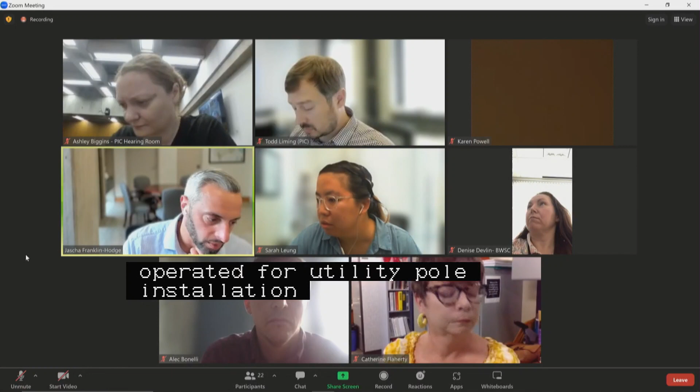On to our next agenda item, utility pole hearing number 1 on a joint petition by Eversource Energy and Verizon New England Incorporated for utility pole installation within Crosstown Avenue, Public Way, West Roxbury, to relocate one private utility pole to be located on its northerly side, generally at address numbers 1 through 7 west of Centre Street. Would the proponents please introduce themselves, their affiliations, give a brief overview of the project, and then we'll open it up for commissioners to ask questions, followed by PIC staff and public comment.

Hi, good morning. This is Catherine Flaherty from Eversource Electric. We are asking to relocate that pole approximately 18 feet west from the current location because of new construction there. There's a driveway. I can share the plan with you. That would be great. You can see that. Just a second.

While Katie's doing this, I will just mention that this section of Crosstown Ave is actually a private way. We're bringing this to the commission just for clarity's sake and so that everybody understands what's going on, but just wanted to make that clear. There we go. Okay. Can you see the plan now? Yes. So here's the pole now where it is located, and then we're asking to relocate it right over here, out of the way of the new driveway.

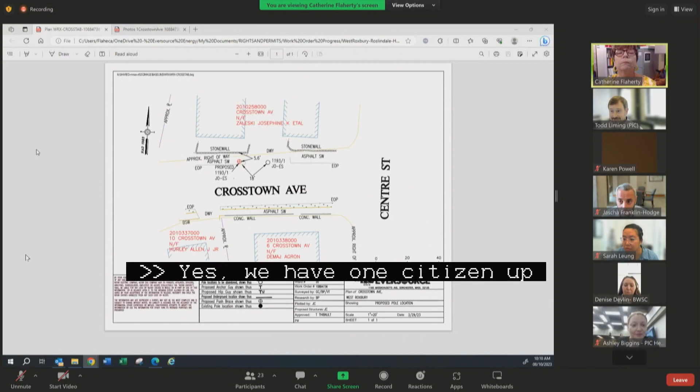Thank you very much. Commissioners, any questions or comments? PIC staff or members of the public? Nope. Ashley, you're all set on this? Yes, we have one citizen up here that's just kind of checking out to see what's going on, but no comments as of now. Ashley, you're muted. Oh, you can't hear the room? Or the room is muted, I should say. Okay, well, we're good. All set. Thank you.

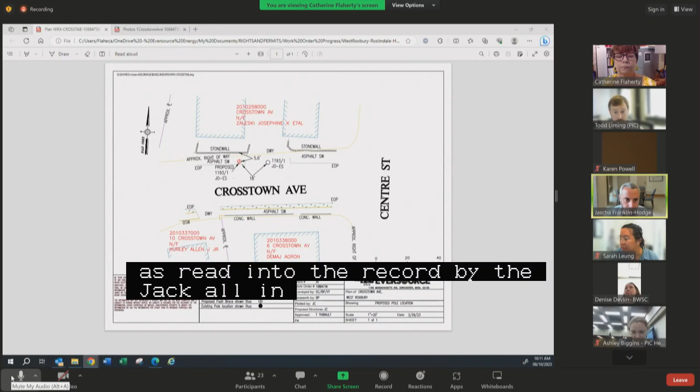All right, hearing no other comments or questions and seeing no raised hands from members of the public, do I hear a motion to approve utility pole hearing number 1? I'll make a motion to approve utility pole hearing number 1 on a joint petition by Eversource Energy and Verizon New England Incorporated for utility pole installation within Crosstown Ave, Public Way, West Roxbury, as read into the record by the chair. Second. All in favor? Aye. Aye. Aye. Aye. Any opposed or abstained? So moved. Thank you very much. Thank you.

On to our first public hearing on a petition by the Boston Redevelopment Authority, DBA Boston Planning and Development Agency, for the acceptance of 2 pedestrian easements adjacent to the following public ways in Boston proper: Hudson Street on its westerly side at address numbers 49 to 63, generally between Kneeland Street and Harvard Street; Tyler Street on its easterly side at address numbers 48 to 58, generally between Kneeland Street and Harvard Street.

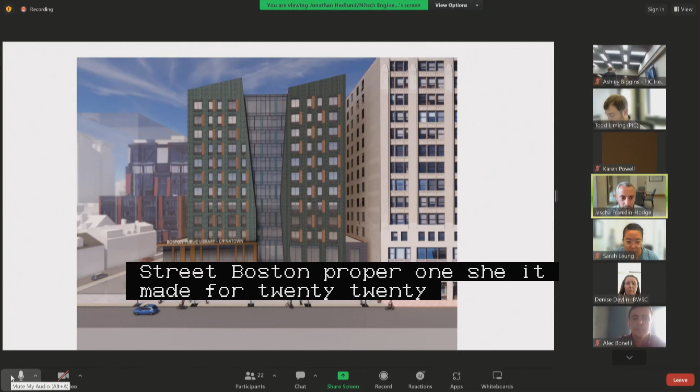This was new business on July 27th and is shown on a plan entitled City of Boston Public Works Department Engineering Division Pedestrian Easement Plan, 55 Hudson Street, Boston proper, one sheet dated May 4th, 2023. Would the proponents please introduce themselves, their affiliations, provide a brief reintroduction to the project, and report back on any changes or outstanding questions from your new business hearing.

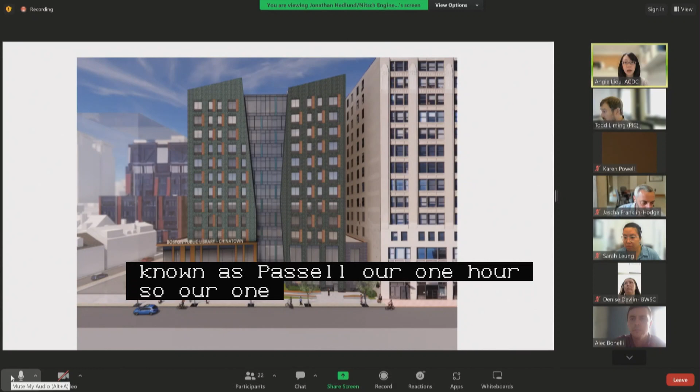Hi, everyone. My name is Angie Liu, and I am the Executive Director of the Asian Community Development Corporation, which is the proponent for this project at 55 Hudson Street, also known as Parcel R1. Parcel R1 is a site currently owned by the Boston Planning and Development Agency. This site on Hudson Street is located in the heart of Boston's Chinatown and has long been advocated by the Chinatown community for its conversion from a parking lot to community uses, including affordable housing.

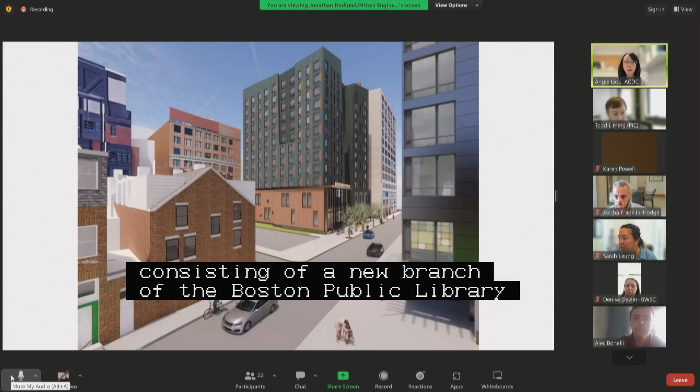The proposed project will consist of a 12-story building, as you see here, consisting of a new branch of the Boston Public Library on the first 2 floors, which Chinatown has not had for about half a century. The upper floors will consist of 110 residential units, which will be affordable, with 44 homeownership units and 66 rentals.

And now I'm going to turn it over to Jonathan Hedlund from Nitsch Engineering.

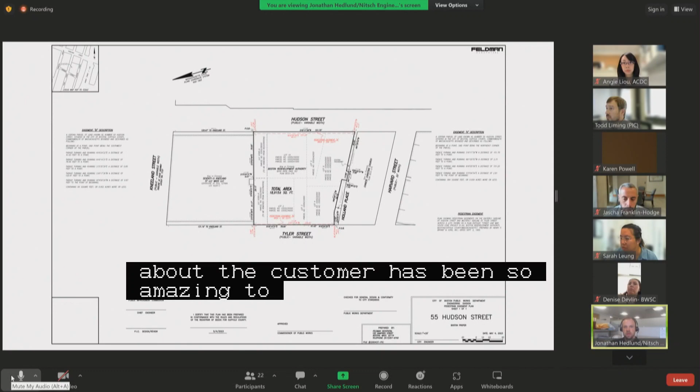I'm Jonathan Hedlund with Nitsch Engineering on behalf of the proponent. I'll first talk about the pedestrian easements. We're proposing 2 pedestrian easements, one along Hudson Street and one along Tyler Street. The one along Hudson Street will be approximately 2.5 feet by 151 feet. The one along Tyler Street will be approximately 0.8 feet by 200 feet.

Excellent, thank you very much. Commissioners, any questions or comments? PIC staff or members of the public? No, I'm all set here.

All right, do I hear a motion to approve public hearing number 1? I'll make a motion to approve public hearing number 1 on a petition by the Boston Redevelopment Authority for the acceptance of 2 pedestrian easements along the following public ways: Hudson Street and Tyler Street, as read into the record by the chair.

Second. All in favor? Aye. Aye. Any opposed or abstained?

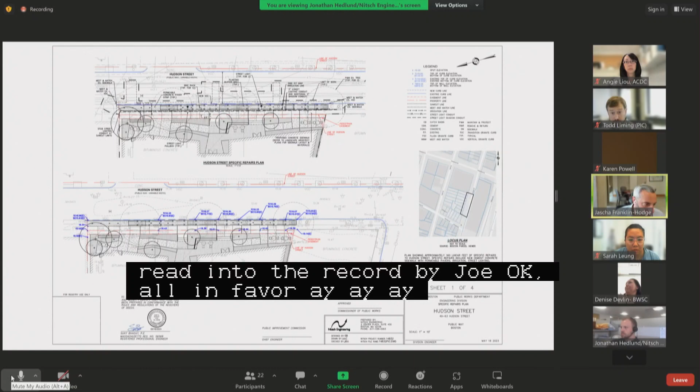So moved. On to public hearing number 2, on a joint petition by Asian Community Development Corporation and the Boston Redevelopment Authority, DBA Boston Planning and Development Agency, for the making of specific repairs within the following public ways in Boston proper, consisting of curb and sidewalk reconstruction with structural soil, as well as new and relocated specialty pavement, street lighting infrastructure, street trees, irrigation infrastructure, bike racks, and curb cuts. Hudson Street on the westerly side at address number 49 to 63, generally between Kneeland Street and Harvard Street. Tyler Street on its easterly side at address numbers 48 to 58, generally between Kneeland Street and Harvard Street.

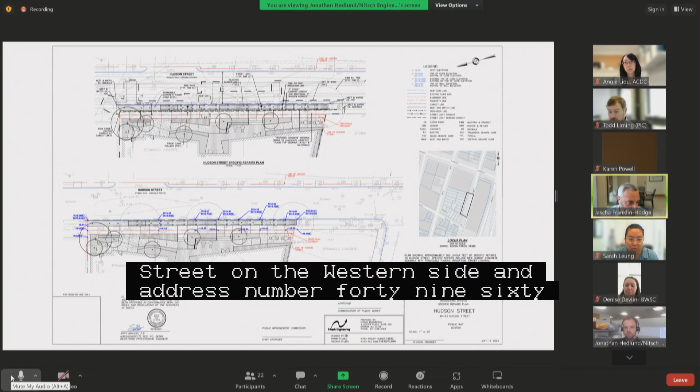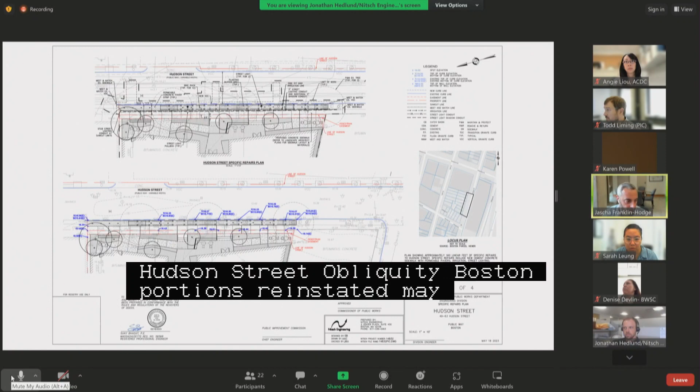This is new business on July 27th, as shown on a set of plans entitled City of Boston Public Works Department Engineering Division Specific Repairs Plan, Hudson Street, Tyler Street, 49 to 63 Hudson Street, Public Way, Boston, 4 sheets, dated May 18th, 2023. Would the proponents please reintroduce themselves and their affiliations, and then provide us with an overview of this particular set of actions and any updates since your last hearing.

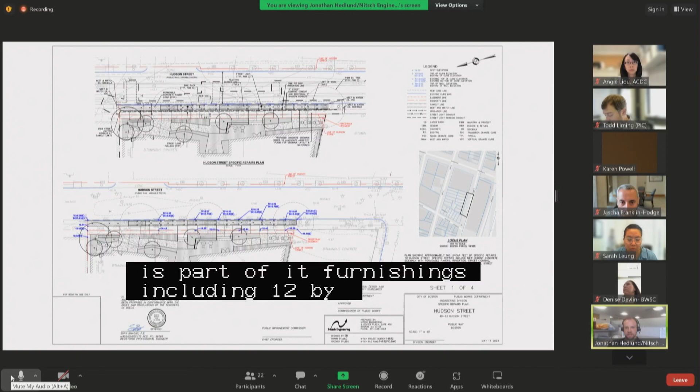Good morning, I'm Jonathan Hedlund with Nitsch Engineering on behalf of the proponent. First, the specific repairs along Hudson Street: this consists of new vertical granite curb, new cement sidewalk facilitating a 6-foot path of travel, 2 new streetlights with pole boxes, conduit, and shadow conduit, a 4-foot furnishing zone including 12 bike racks. We're maintaining the 3 existing trees. This includes a porous paver strip along with the irrigation. We are proposing 7.8 feet from back of curb to property line, but with this we are proposing a 2.5-foot pedestrian easement to facilitate the 6-foot path of travel.

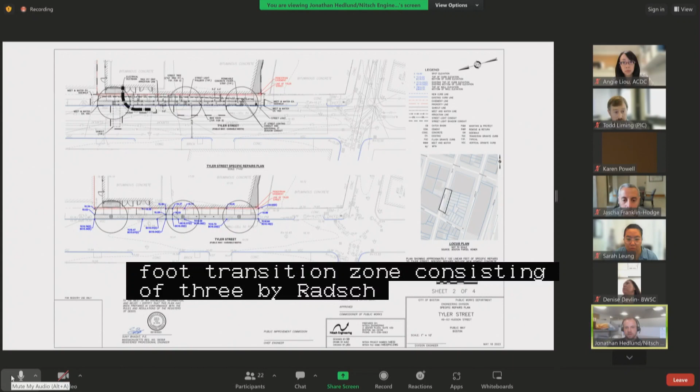Moving on to Tyler Street: this consists of new granite curb, new cement sidewalk facilitating a 5-foot or greater path of travel, 1 new streetlight with pole boxes, conduit, and shadow conduit, a 3-foot transition zone consisting of 3 bike racks, 3 trees, a porous paver strip, and irrigation. We're also proposing a mid-block loading ramp for dumpster drop-off, along which will be a 60-foot pickup and drop-off area adjacent to the ramp. In this area, we're also proposing a 0.8-foot pedestrian easement to facilitate the 5-foot path of travel. This concludes the specific repairs for these 2 streets.

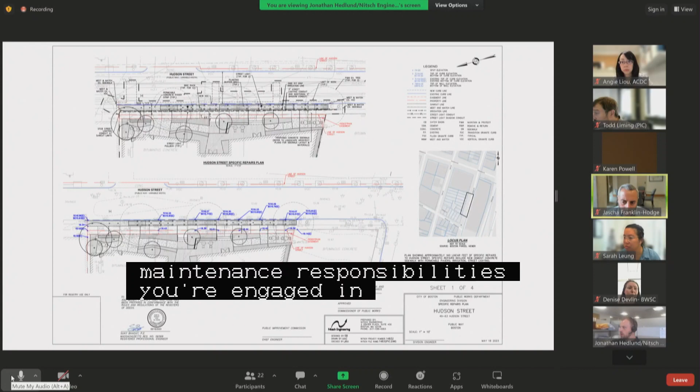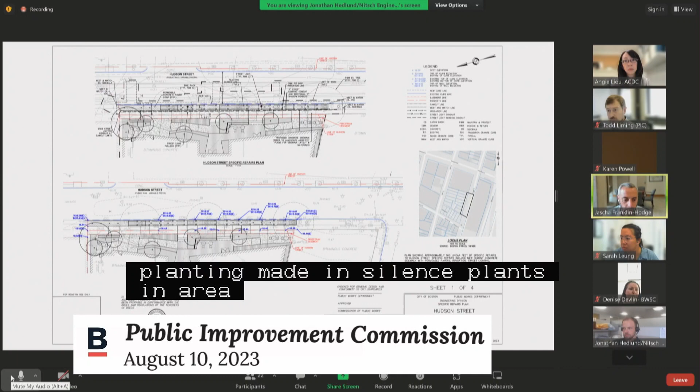Thank you very much. Can you just confirm the maintenance responsibilities associated with the irrigation and any planted areas? Angie, correct me if I'm wrong, but an LMI will be created for these areas. I'm sorry, could you repeat the question? My question was just to confirm who will be taking on maintenance responsibility for the irrigation system and for any plantings made inside of a planted area. Obviously there's some existing trees being retained, but it sounds like there's some new green elements being introduced in the public right-of-way, and I just want to understand whether the proponent will be executing an LMI to cover their responsibility to maintain those things. I believe so, but I can confirm that.

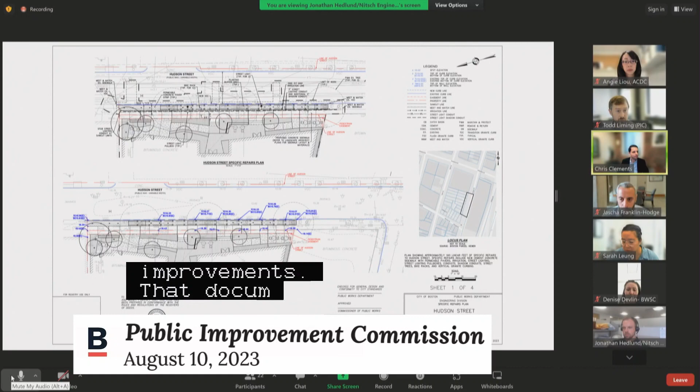Hi everyone, this is Chris Clements with Goulston and Storrs, representing the proponent applicant here. There is indeed a draft LMI whereby the applicant will be maintaining these areas and these improvements. That document is currently under review, but it would provide that the applicant would maintain those irrigation items and all the other elements on the plans.

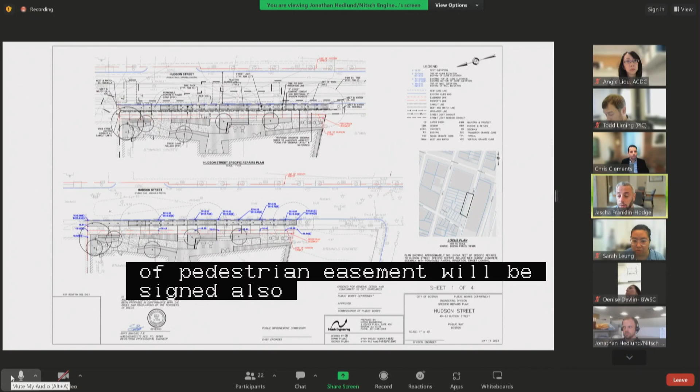Okay, and will that LMI be executed by the developer, by the BPDA? Who's the responsible party? By the developer. And then there'll be separately a grant of pedestrian easement that will obligate the developer to maintain the pedestrian easement areas, though that grant of pedestrian easement will be signed also by the BPDA as fee owner of that area. Okay, excellent, thank you very much for that clarification. Commissioners, other questions?

All right, hearing none. PIC staff or members of the public? All set. All right, seeing no raised hands, do I hear a motion to approve public hearing number 2?

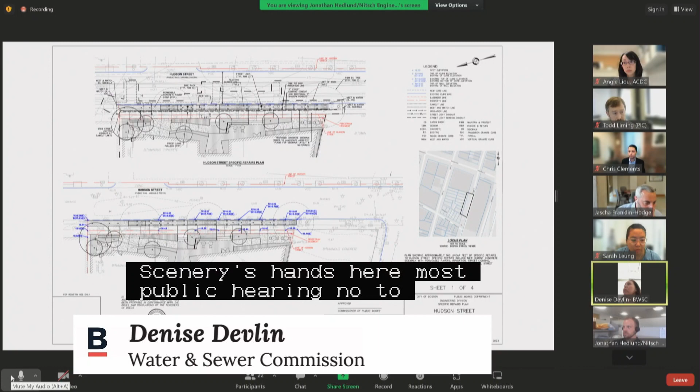I'll make a motion to approve public hearing number 2 on a joint petition by Asian Community Development Corporation and the Boston Redevelopment Authority for the making of specific repairs within the following public ways in Boston Proper, consisting of curb and sidewalk reconstruction with structural soil, irrigation, infrastructure, bike racks, and curb cuts in Hudson Street and Tyler Street as read into the record by the chair. Second. All in favor?

Aye. Any opposed or abstain? So moved. Thank you very much. Thank you.

On to public hearing number 3 on a petition by Related Beal DBA RREF3, the Town Portfolio LLC, for the making of specific repairs within the following public ways in Charlestown, consisting of curb realignment and sidewalk reconstruction, as well as new and relocated pedestrian ramps, specialty pavement, street lighting infrastructure, storm drain infrastructure, street trees, landscaping, and bike routes. Rutherford Avenue on its southwesterly side at addresses number 420 to 438, northwest of Bunker Hill Industrial Park, Bunker Hill Industrial Park, southwest of Rutherford Avenue, new business from July 27th, as shown on a set of plans entitled City of Boston Public Works Department Engineering Division Specific Repairs Plan, Rutherford Avenue, Bunker Hill Industrial Park, 420 Rutherford Avenue, Charlestown, 2 sheets dated March 2023.

Would the proponents please introduce themselves, their affiliations, give us a brief reintroduction to the proposed actions and any updates since your new business hearing.

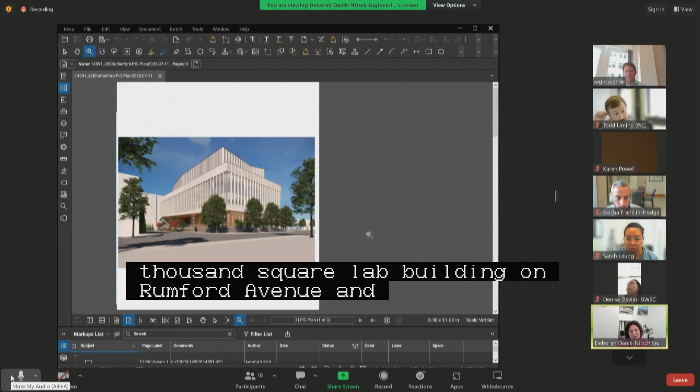Thank you, Will. Hi, I'm Deb Danik with Nitsch Engineering. As Will mentioned, we're redeveloping the site at 420 Rutherford Avenue, which includes a new building. As part of the redevelopment on the private site, we're proposing to do improvements to Rutherford Avenue, which is on the northeast part of the site, as well as Bunker Hill Industrial Park, which is more on the southern part of the site.

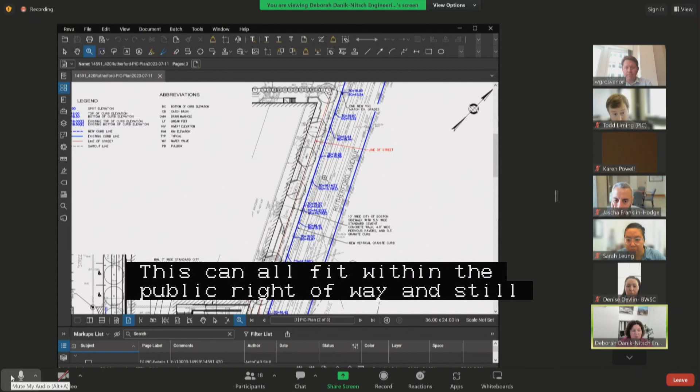When we look at the improvements on Rutherford Avenue, we're proposing to install new granite curb, porous paver strip, and cement concrete sidewalk. This can all fit within the public right-of-way and still provide a pedestrian path of travel—excuse me, this will be 10 feet wide. The improvements within Rutherford Avenue and the sidewalk have been closely coordinated with the BPDA and the BTD team for their future larger improvements that are happening in Rutherford Avenue in their design plan.

As we wrap around the corner of the building to Bunker Hill Industrial Park, we're proposing more robust improvements within this area. We will be providing a 7-foot wide cement concrete path of travel, bounded on both sides by a tree near the curb, a bike share station, and closer to the building, we'll have intermixed more trees as well as some bicycle racks. We'll have the cement concrete sidewalk at 7 feet wide, new granite curb, and new accessible ramps and a driveway opening to a potential future road, which would connect to the Hood Park area.

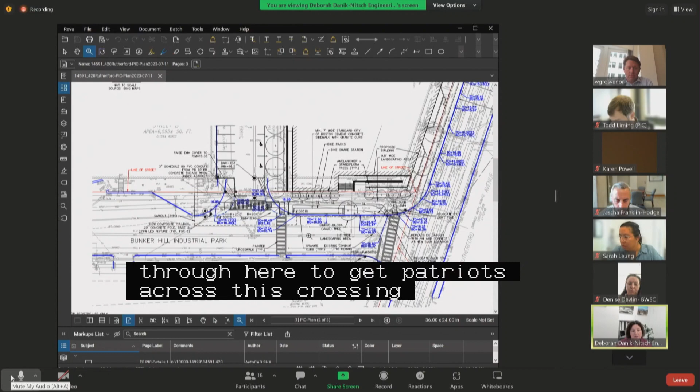We have new ramping to get pedestrians across this crossing, and we've also proposed new street lighting. We've coordinated closely with Boston Street Lighting. Currently there's very minimal street lights on Bunker Hill Industrial Park, so we're proposing 3 new light poles, relocation of 1 light pole, and an adjustment of a street lighting cabinet to meet their current standards.

We also have a couple of pedestrian crosswalks at Bunker Hill Industrial Park. One of the crossings has an existing compliant accessible ramp; the other does not, so we will be reconstructing that to meet current compliance and our proposed alignment of the crossing. With that, those are the proposed improvements.

Since last time we did receive some comments from the commission regarding this building currently under construction. We followed up with our contractors about accessibility and access to the sidewalks, as well as provided information relating to the sidewalk permits we have in place and the construction management plan. If there are any questions or comments, we are available.

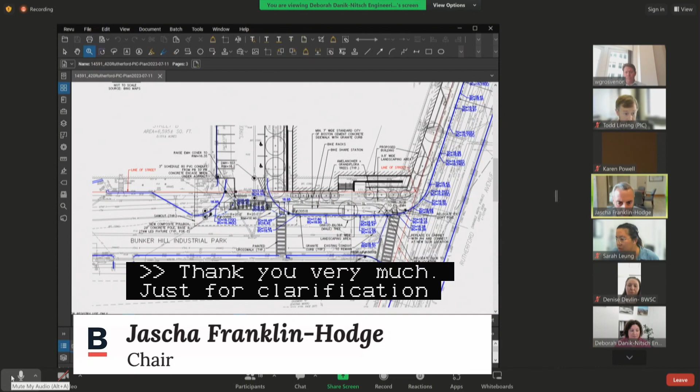Just for clarification, the sidewalk across Bunker Hill Industrial Park, coming in from Rutherford, at the bottom of the drawing - I'm not seeing a curb ramp or tactile warning. Is that pre-existing? I'm looking at the one right here, exactly there.

There is an existing landing and an existing tactile panel. This was actually reconstructed recently. Okay, I see it now - I see the DWS, very small. Yeah, there we go.

But that is confirmed to be in compliance? Yep, when we did it - we can double check. Deb, can you just update the plan to call that out as compliant? Sure, absolutely. Thank you.

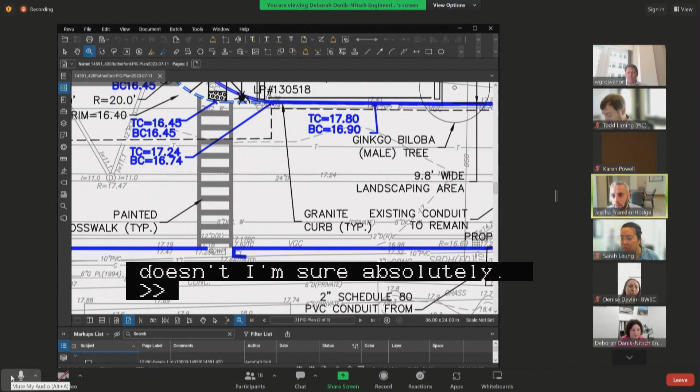Similar question to the previous business item regarding the landscaped area being created - what is the intended maintenance plan for that, and will there be an LMI in place to cover those responsibilities? Yeah, so there will be an LMI in place.

Currently, the landscaped items within the public way are the trees on Bunker Hill Industrial Park at the back of sidewalk and at the curb. We're still coordinating with Parks - they mentioned they may take maintenance since we're proposing their standard tree pit and standard trees, but they haven't confirmed that. If they don't confirm, I'm pretty confident the development team would take over maintenance in the LMI, but we can let Will confirm that.

That is confirmed, 100%. Thank you - and the area shown as grass here, is that outside the public right-of-way? Right here there will be some grass, which is in the public right-of-way. So that will also be included as an item to be maintained either by Parks or by the proponent? Correct, yep. Okay, great.

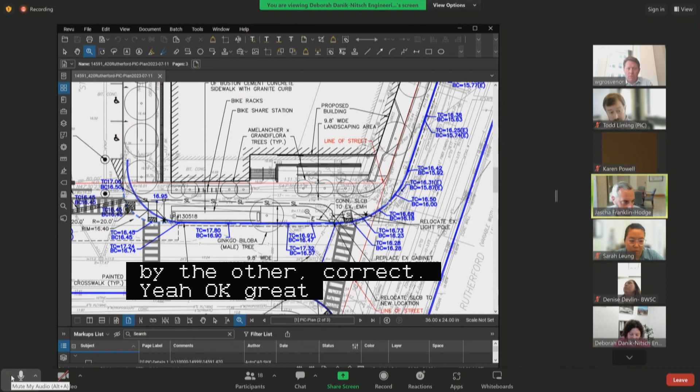Commissioners, other questions, comments? PIC staff, members of the public? I think we're all set on this.

All right, do I hear a motion to approve public hearing number 3? I make a motion to approve public hearing number 3 on a petition by Related Beal for the making of specific repairs within the following public ways in Charlestown: Rutherford Avenue and Bunker Hill Industrial Park, as read into the record by the chair. Second. All in favor? Aye. Aye. Any opposed or abstain? So moved. Thank you very much.

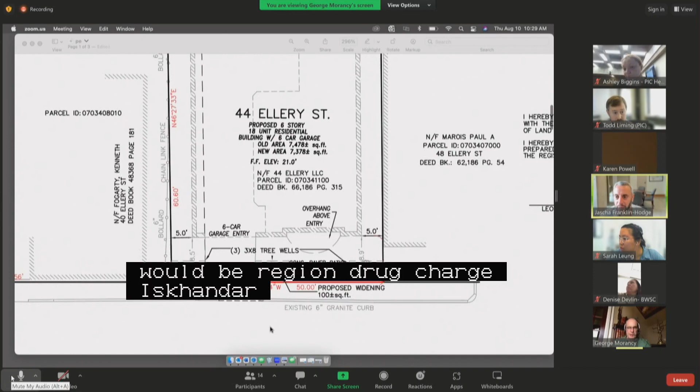We can, George, I'm just going to interrupt you here. For the public hearing, we have to consider these each as separate actions, so we'll do one at a time. Thank you, all right, excellent.

Commissioners, any questions or comments on the - pedestrian easement, street widening, I believe this is - I'm sorry, excuse me, street widening, thank you very much. Widening and relocation. PIC staff, members of the public? All set? All right, do I hear a motion to approve public hearing number 4?

Make a motion to approve public hearing number 4 on a petition by 44 Ellery LLC for the widening and relocation of the existing right-of-way lines of Ellery Street, South Boston, as read into the record by the chair. Second. All in favor? Aye. Aye. Any opposed or abstain?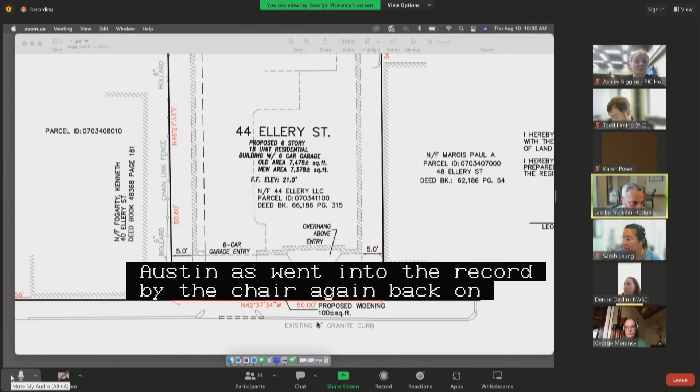So moved. On to public hearing number 5, on a petition by 44 Ellery LLC for the acceptance of a pedestrian easement adjacent to Ellery Street Public Way, South Boston, located on its easterly side, generally at address number 44, generally between Southampton Street and Boston Street. New business from July 27th, as shown on a plan entitled City of Boston Public Works Department Engineering Division Pedestrian Easement Plan, 44 Ellery Street Public Way, South Boston, one sheet dated August 8th, 2023.

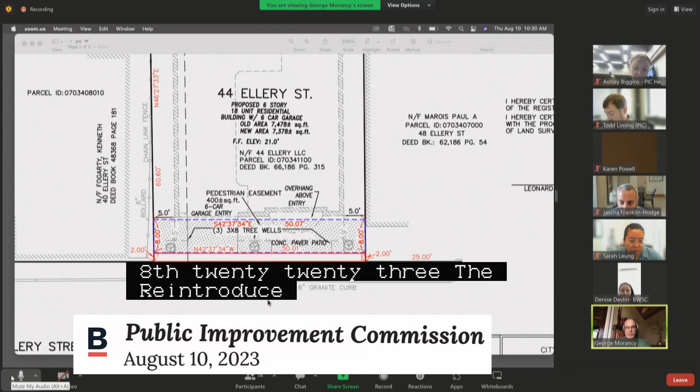Would the petitioner please reintroduce himself and give us an overview of this action? This is George Morancy, I'm the attorney for the petitioner, 44 Ellery LLC. This is a related petition for a pedestrian easement in front of the site at 44 Ellery Street. The petition plan depicts a new 8-foot wide by approximately 50-foot long pedestrian easement for purposes of increasing the sidewalk width and for the installation of future street trees.

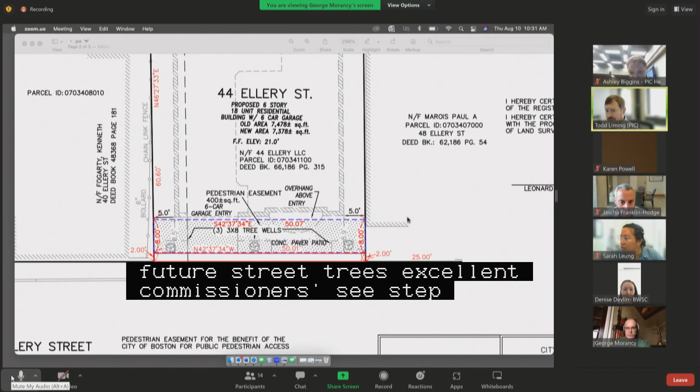I do have one question on this, George. It looks like you have a building entry above a portion of the pedestrian easement area. Can you confirm that canopy will be at least 10 feet above finished grade? That will be at least 10 feet above finished grade. We can call that out on the plan if you would like. That'd be great, thanks.

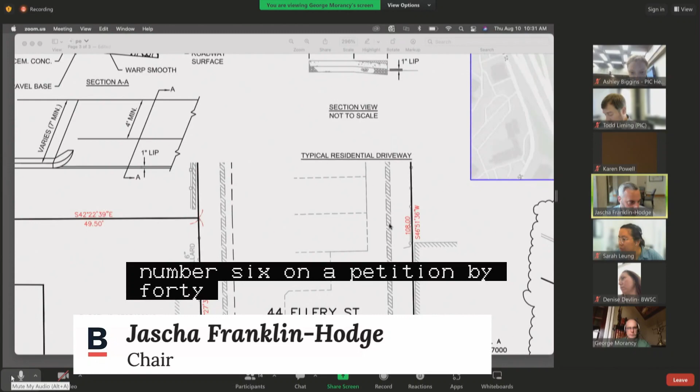On to public hearing number 6 on a petition by 44 Ellery LLC for the making of specific repairs within the following public ways in South Boston, consisting of curb, sidewalk, and pedestrian ramp reconstruction, as well as new and relocated street trees and driveway curb cuts. Ellery Street on its easterly side, generally at address number 44, between Southampton Street and Boston Street. Southampton Street on its southerly side at Ellery Street, Boston Street on its westerly side at Ellery Street. New business from July 27th, as shown on a plan entitled City of Boston Public Works Department Engineering Division Specific Repair Plan, 44 Ellery Street, South Boston, one sheet dated August 8th, 2023.

The proponents please reintroduce themselves and give us an overview of this action as well as any changes since your last hearing. My name is George Morancy, I'm the attorney for the petitioners, 44 Ellery LLC. This third plan is also related to the new residential project at 44 Ellery Street.

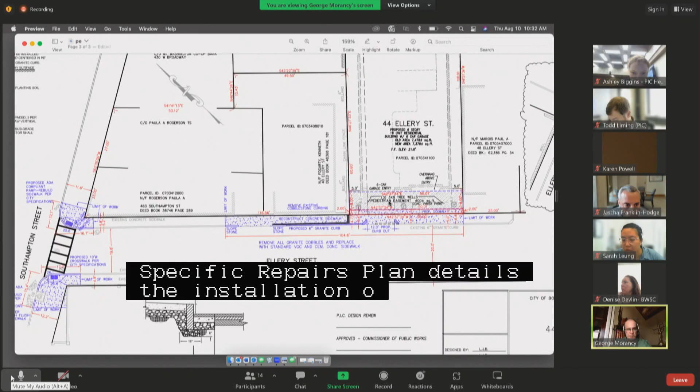This specific repairs plan details the installation of a new 12-foot curb cut on Ellery Street servicing the building, the removal of existing cobblestone curbing on a portion of Ellery Street, installation of a new granite curb on a portion of Ellery Street, installation of 3-foot by 8-foot tree wells in front of the building, and the installation of new ADA compliant pedestrian ramps at the two corners of Ellery Street's intersection with the easterly side of Southampton Street, westerly of the site. These pedestrian ramps would facilitate access to and from the MBTA's Andrew Station Red Line stop, located directly across Southampton Street.

Finally, the specific repairs plan details the rebuilding to city standards of the sidewalks surrounding the two new pedestrian ramps and the striping of a new 10-foot wide crosswalk meeting city standards, which will cross Ellery Street. There have been no changes since the new business hearing.

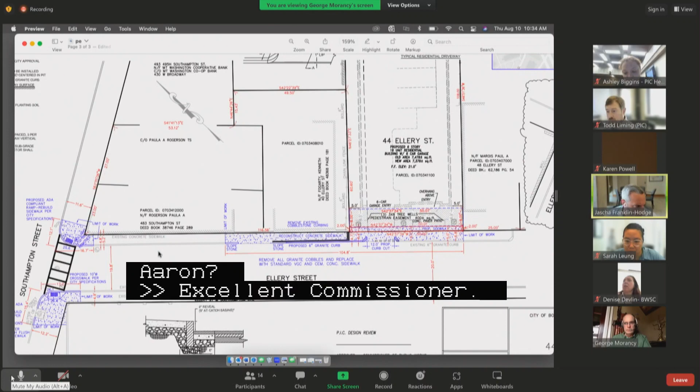Commissioners, any questions or comments? Just for clarity, I do see on the agenda item that Boston Street is included in the list of streets affected by this. I'm not seeing anything on this plan affecting Boston Street.

I'm sorry, just want to confirm that there's no... there we go. There will be a new painting of a crosswalk. I got it, okay, the other end of Ellery Street, sorry, I had it out of the picture. Got it.

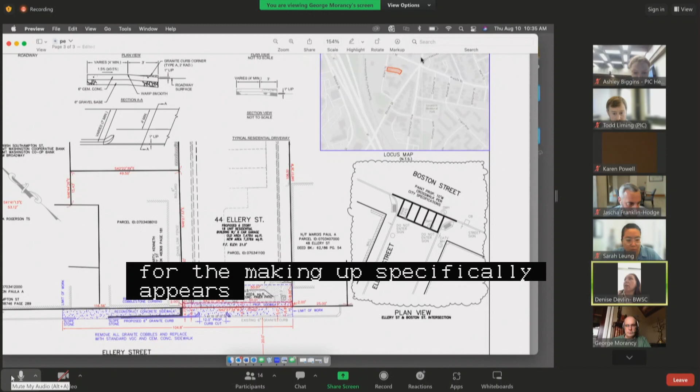Make a motion to approve public hearing number 6 on a petition by 44 Ellery LLC for the making of specific repairs within the following public ways in South Boston: Ellery Street, Southampton Street, and Boston Street, as read into the record by the chair. Second. All in favor? Aye. Aye. Any opposed or abstained? So moved, thank you very much.

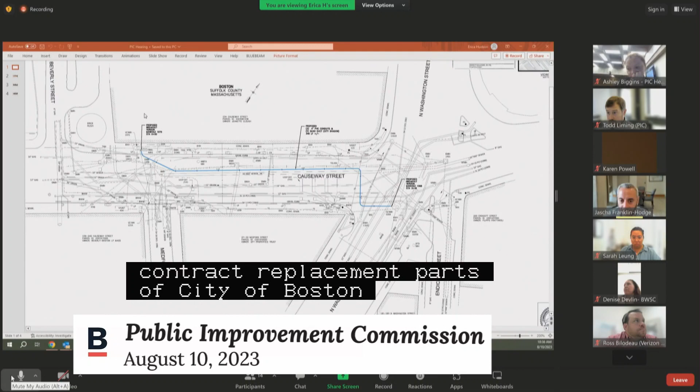The proponents please introduce themselves, their affiliations, give us a brief overview of this action and whether there has been any changes since your new business hearing.

Good morning, members of the PIC. My name is Erica Hudson from Sienna Engineering Group, representing TC Systems.

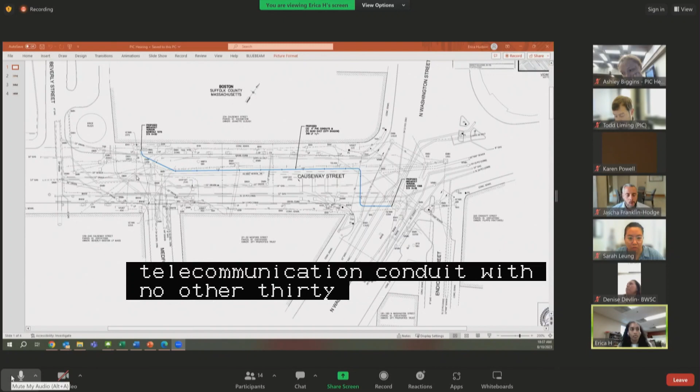As previously discussed, TC Systems is seeking grants of location on Causeway Street to place telecommunications conduit with no other participants. Starting on Causeway Street, we will be breaking out of Verizon manhole 1075, and the conduit will continue northeast through the intersection of Causeway Street and North Washington Street to Verizon manhole 1068. The conduit will consist of 2 4-inch PVC conduits and 1 quad duct city shadow, a total of approximately 346 feet.

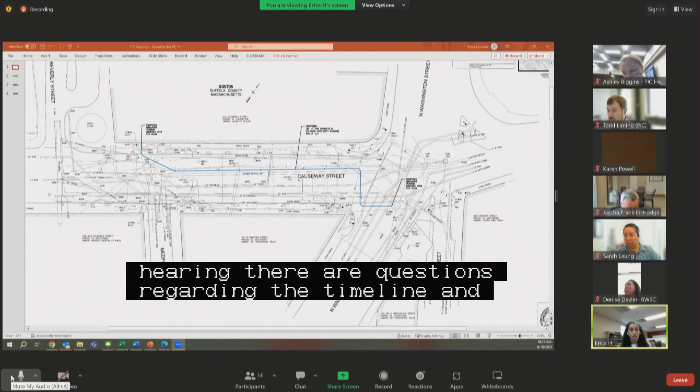During the new business hearing, there were questions regarding the timeline and restoration. The duration of work will only be for 1 day, and restoration will be on the day of construction as well. We will make sure to restore the pavement to its current condition or better. Thank you very much. Commissioners, questions, comments?

PIC staff or members of the public? All set on this. All right, do I hear a motion to approve public hearing number 7?

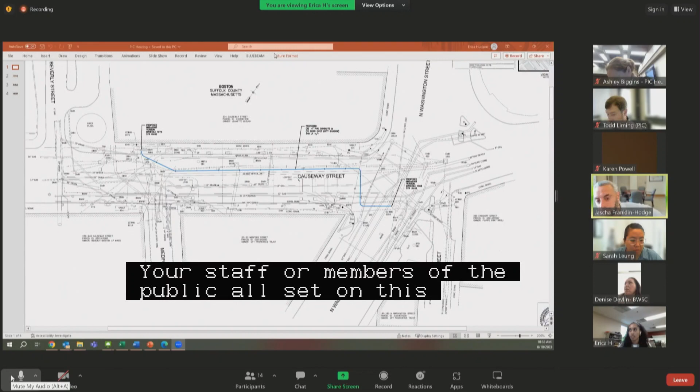I make a motion to approve public hearing number 7 on a petition by TC Systems Incorporated for a grant of location with lead company status and no participants within Causeway Street, Boston proper, as read into the record by the chair. Second. All in favor? Aye. Aye. Any opposed or abstained? So moved. Thank you very much.

Thank you. On to public hearing number 8 on a petition by Verizon New England Incorporated for a grant of location with lead company status and no participants to install new telecommunication conduit with city shadow within the following public ways in Dorchester: Homes Avenue between Draper Street and Mount Ida Road, Mount Ida Road southeast of Homes Avenue. New business from July 27th as shown on a plan entitled City of Boston Public Works Department Engineering Division Grant of Location Plan, Verizon, Homes Ave and Mount Ida Road, proposed conduit installation, 1 sheet dated January 2023.

The proponents please introduce themselves, their affiliations, and give us an overview of what's being proposed and any changes or updates since your new business hearing. Good morning, my name is Ross Bilodeau. I'm representing Verizon New England. I'm going to go ahead here and share my screen.

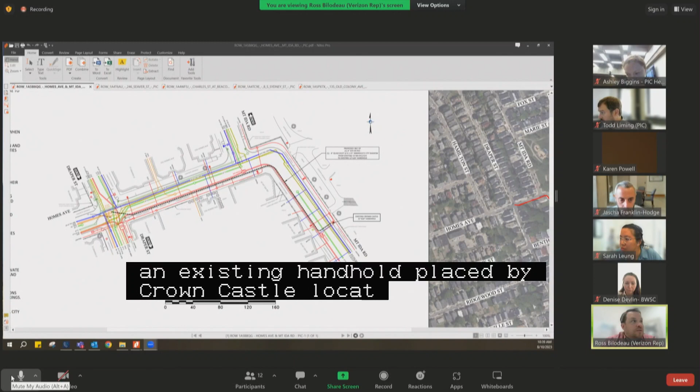We were looking to place 383 feet of underground conduit with city shadow from our existing manhole 11/319, located on Homes Avenue, to an existing handhole placed by Crown Castle, located across from 93 Mount Ida Road, for the purpose of providing new services. I believe when this was presented to you last time, you had asked for pictures of the existing pavement, which we forwarded to you guys last week, August 3rd, it looks like. No further updates beyond that.

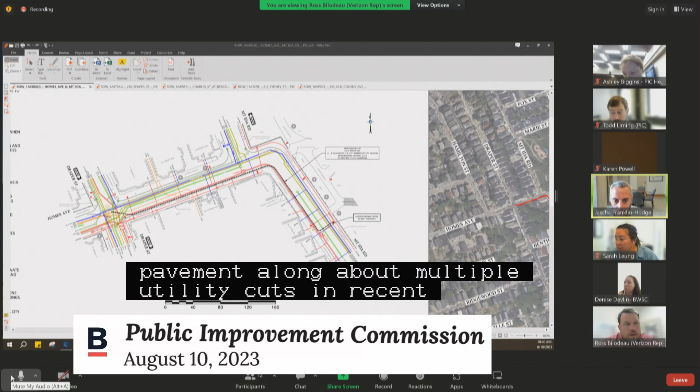So thank you for the photos. Given the condition of the pavement along Mount Ida, which has had multiple utility cuts in recent years, would Verizon be willing to do a full resurface of that section of the street as part of this project? I believe there has been some discussion about that already, and it's my understanding Verizon has no issues for the required paving. And by required, you mean to repave the curb to curb for the extent of the stretch of Mount Ida that you will be impacting with this?

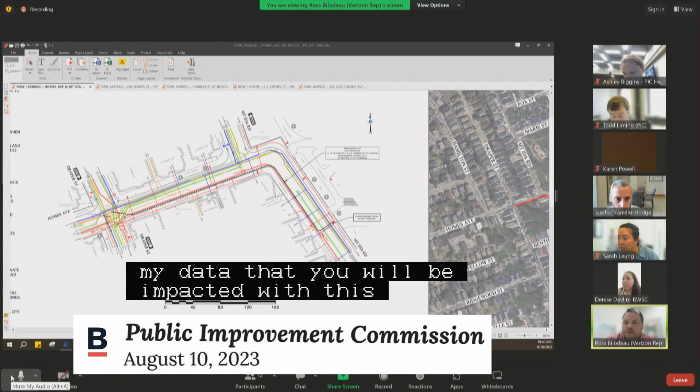Yes, that's my understanding. Whatever you guys were asking for originally, then that's what we were willing to do. Okay, that would be very much appreciated. The residents have endured multiple utility actions for telecom and other purposes here, and the road is in very poor condition, so we appreciate that.

Commissioners, other questions, comments? PIC staff or members of the public? No, we're all set. Thank you for sending along those site photos a few weeks ago. That was helpful. No problem. Do I hear a motion to approve public hearing number 8?

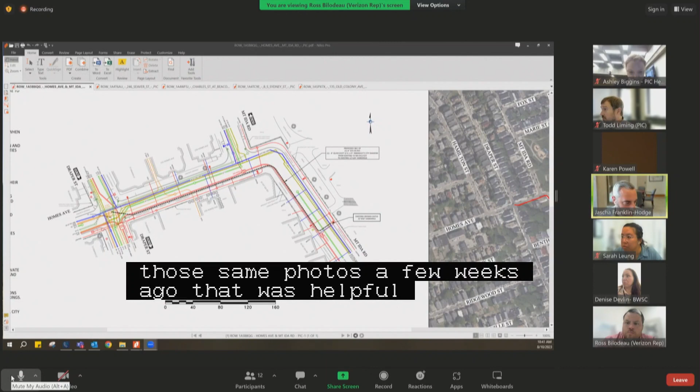Make a motion to approve on a petition by Verizon New England Incorporated for a grant of location within the following public ways in Dorchester: Homes Avenue, Mount Ida Road, as read into the record by the chair. Second. All in favor? Aye. Aye. Any opposed or abstain?

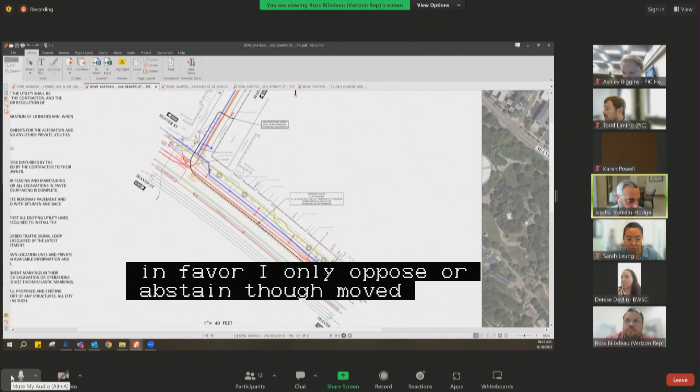So moved. On to public hearing number 9 on a petition by Verizon New England Incorporated for a grant of location with lead company status and no participants to install new telecommunications conduit with city shadow within the following public ways in Roxbury: Seaver Street, generally at address number 246 southeast of Maple Street northeast of Seaver Street. New business from July 27th as shown on a plan entitled City of Boston Public Works Department Engineering Division Grant of Location Plan, Verizon 246 Seaver Street proposed conduit installation, one sheet dated July 2023.

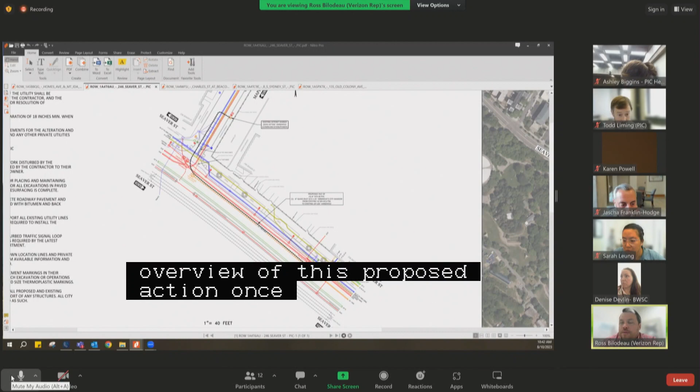The proponents please reintroduce themselves and give us an overview of this proposed action. Once again, Ross Bilodeau representing Verizon New England. This is a public hearing for one that was presented a few weeks ago. Again, we're looking to place 263 feet of new conduit from an existing manhole 15 over 782, located in front of 258 Seaver Street, to the intersection of Seaver Street and Maple Street. Then continue to place 91 feet of conduit on Maple Street to an existing handhole. I believe this one was placed by Extenet, correct?

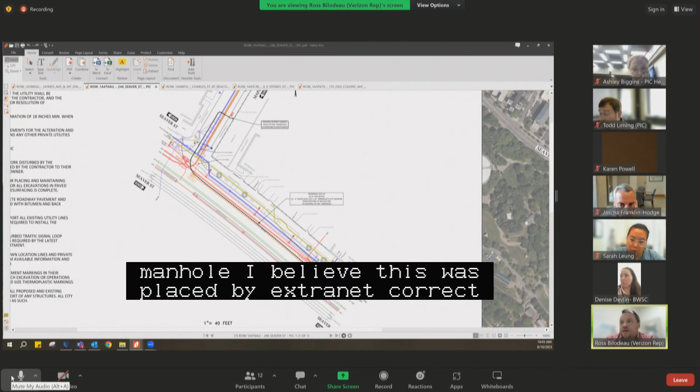To an existing handhole on the side of 246 Seaver Street, again for the purposes of providing new services on Seaver Street. I know you guys were looking for pictures of this one as well, of the existing pavement, which we forwarded to you a few weeks back.

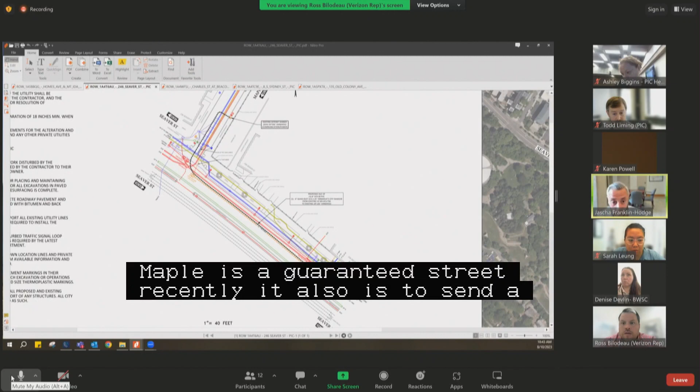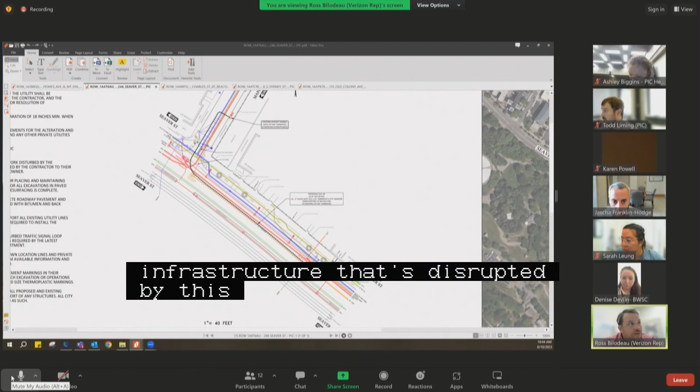Thank you very much. Just to confirm, I believe Maple is a guaranteed street, recently repaved. It also hosts some BTD traffic signal loops, so I want to confirm we will follow all requirements for resurfacing and fully restoring guaranteed streets, as well as restoration of any BTD traffic signal infrastructure disrupted by this. Yes, I can confirm that. Verizon had no issues with the required paving on this one as well.

All right, commissioners, questions, comments? PIC staff, members of the public? All set.

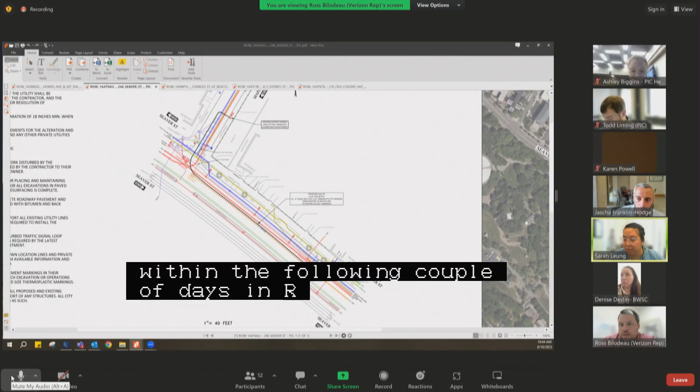Excellent. Do I hear a motion to approve public hearing number 9? Make a motion to approve public hearing number 9 on a petition by Verizon New England Incorporated for a grant of location within the following public ways in Roxbury: Seaver Street, Maple Street, as read into the record by the chair. Second. All in favor? Aye. Aye. Aye. Any opposed or abstained? So moved. Thank you very much.

On to the new business section of our agenda. New business number 1, Charles Street at Beacon Street, Boston proper, grant of location on a petition by Verizon New England Incorporated. Would the proponents please reintroduce themselves and give us an overview of this proposed action? Sure, once again, Ross Bilodeau representing Verizon New England.

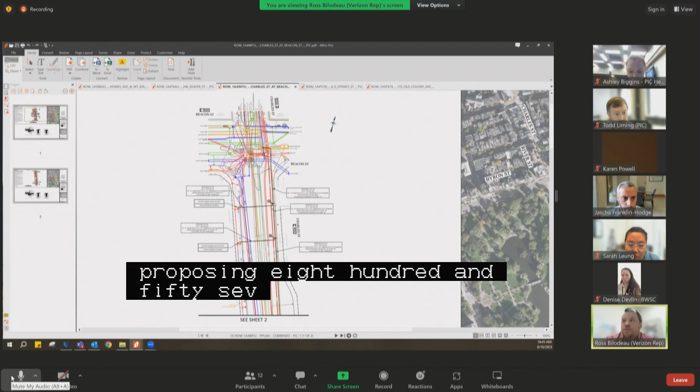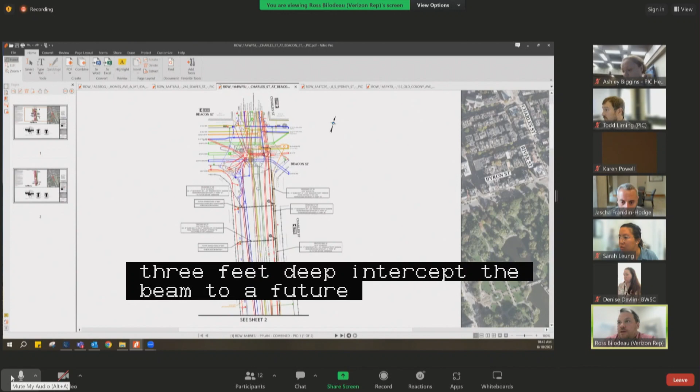Verizon is proposing 857 feet of new conduit on Charles Street, starting from existing manhole 492, located at the intersection of Beacon Street and Charles Street, extending south on Charles Street for 117 feet to an intercept A. We're going to place 65 feet to a future handhole to be placed by Extenet on the westerly side of Charles Street. Continuing from intercept A, we'll place 63 feet to intercept B, to a future handhole, again placed by Extenet on the westerly side of Charles Street. Continuing from intercept B, we'll place 610 feet to a future handhole to be placed by Extenet on the westerly side of Charles Street. Again, this is for the purpose of providing new services on Charles Street.

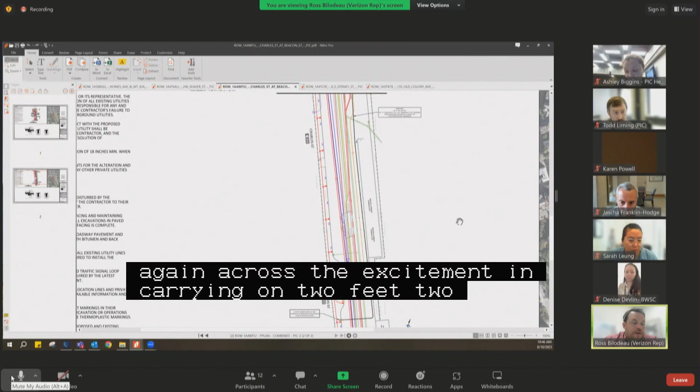So if I follow my plan here, we are at our existing manhole, down to intercept A, cross to the future handhole by Extenet, intercept A to B, again across to Extenet, and carrying on to sheet 2, to the final point, sweeping across to the final future handhole placed by Extenet.

Thank you very much. Has there been any coordination with the Boston transportation teams or the SPEEDS team planning the Public Gardens crossings improvements? There's a number of changes anticipated to the large crosswalk between the Public Garden and the Common, in the middle of that Charles Street block, as well as changes to the Charles and Beacon intersection. Has there been a review and discussion with them? I am not privy to that information, but I can find out and get back to you. Okay, I would ask that you share these plans with that team, and Todd can provide a point of contact as needed, and confirm that nothing here will be disruptive to or incompatible with the work they have planned there. Very good, thank you.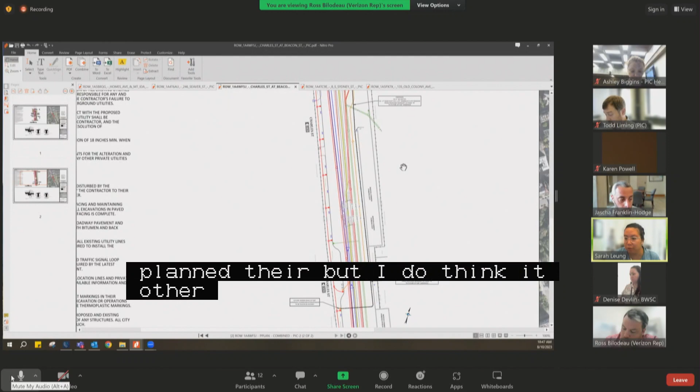Other commissioners, other comments or questions? We just want to confirm with the proponent that special attention is paid to the construction management and detouring of pedestrians, ensuring ADA compliance and safety is maintained, given that this area is pretty busy at most hours of the day. Yes, of course.

I would add that the construction management plan should address the laterals crossing the bike lane, ensuring appropriate diversion for bicycles traveling along Charles Street. If necessary, temporary removal of parking spaces and staging should allow a safe, continuous protected path for bicycles, so they are not diverted into a general purpose travel lane alongside vehicles. Okay, sure.

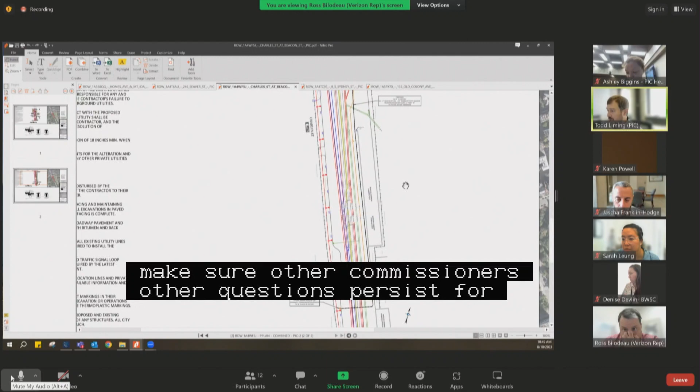Other commissioners, other questions? PIC staff or members of the public? We've discussed this both internally and externally, but just want to confirm that this plan is replacing a similar plan which Verizon had approved by this commission last year. My understanding is that they are abandoning that previously approved plan, and this work is going to take its place. This is what they gave me to present, so this is moving forward as the new plan. I spoke with Karen at Verizon and a couple others, and I believe they confirmed what I just said. I think we're all set. Wanted to put on record.

All right, hearing nothing else, will you be ready for your public hearing in two weeks on August 24th? Yes. All right, we will see you back then for this.

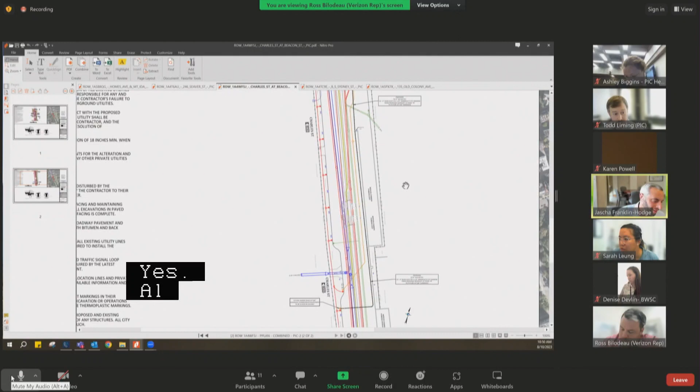On to new business number 2, 16 South Sydney Street, Savin Hill Avenue, Dorchester, granted location on a petition by Verizon New England Incorporated. Would the petitioner please reintroduce himself and give us an overview of what is proposed here? Of course. Once again, Ross Bilodeau representing Verizon New England. Verizon is proposing 279 feet of new conduit from an existing manhole 11 over 238, located at the northeasterly corner of the intersection of Sydney Street and Savin Hill Avenue, to an existing externate handhold located across the street from 25 South Sydney Street, for the purpose of providing new services on South Sydney Street.

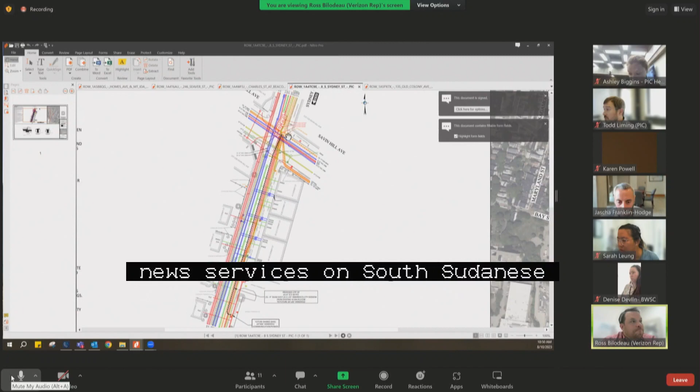So again, here we are, our existing manhole, Savin Hill and Sydney, just extending down the road here to the existing handhold. Thank you very much, commissioners.

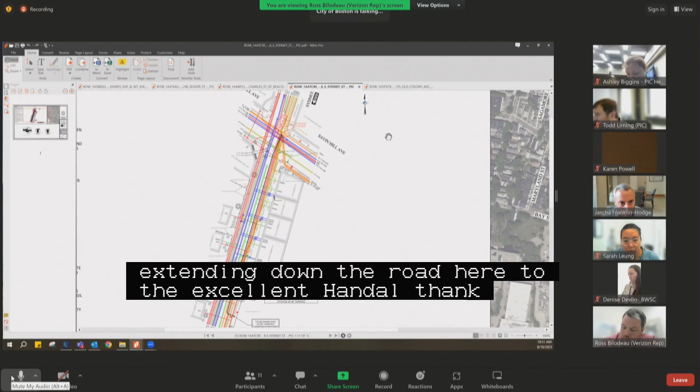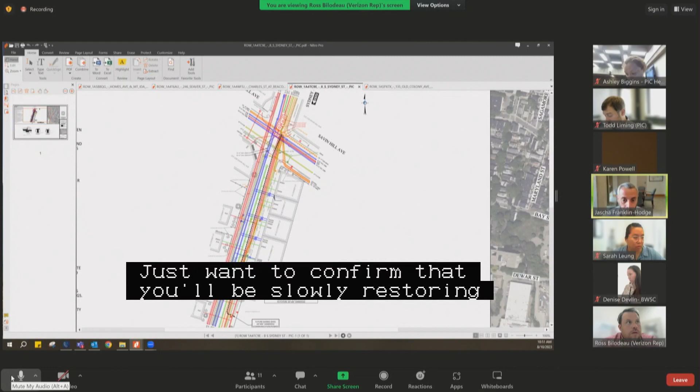All right, hearing nothing from the other commissioners, I guess one item I want to confirm, this is a crosswalk. You'll be cutting through a couple of crosswalks located very close to a train station, transit station, and I believe a school further down South Sydney. I just want to confirm that you'll be fully restoring all of the crosswalk markings that may be impacted by this trenching project. Sure, I can confirm that that can be done. Excellent.

All right, PIC staff, any comments, questions? All set on this one. All right, will you be ready for your hearing in two weeks on the 24th? Yes, sir. All right, we'll see you then.

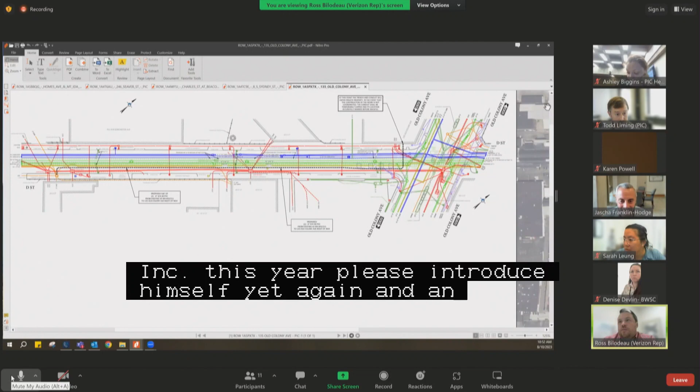And last but not least, new business number 3, D Street at 135 Old Colony Avenue, South Boston, granted location on a petition by Verizon New England Incorporated. Would the petitioner please reintroduce himself yet again and give us an overview of what is proposed here? Sure, once again, Ross Bilodeau representing Verizon New England. Verizon is proposing 546 feet of new conduit from an existing manhole 33 over 211, located in front of 25 D Street, continuing down to 135 Old Colony Avenue, where we'll enter private property for the purpose of providing new services on Old Colony Avenue.

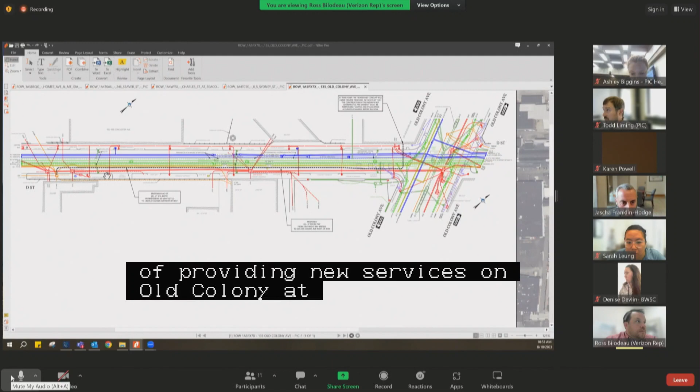So here's our existing manhole, D Street, continuing down and coming across to the private property where it will be picked up by the private property owner in their project.

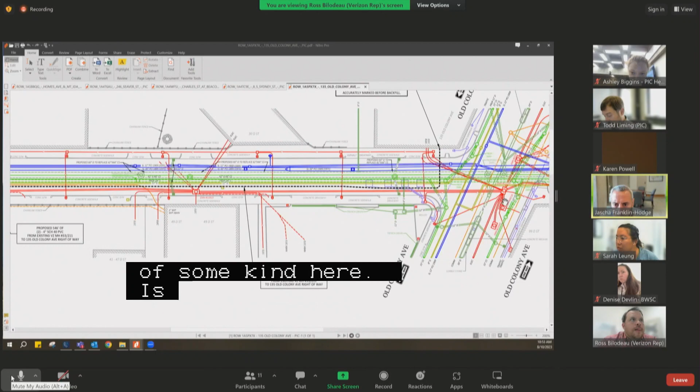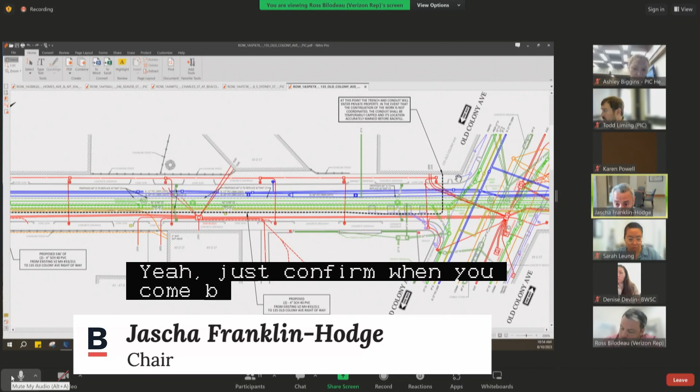I believe, if I'm remembering this part of Old Colony correctly, that there's a median of some kind here. Is that going to be impacted by the path of this conduit across Old Colony, or is that not impacted here? I'm not sure, but I can certainly find out for you later. I'm seeing this, it doesn't look like you're crossing Old Colony here. So okay, right, that was my only question. I can certainly double check. Just confirm when you come back for your public hearing if there is any impact to the median or cobbles or anything like that. Just let us know your intent when it comes to restoration. Sure, I'm not seeing that on the plan here, but please do confirm.

Commissioners, any questions, comments? I think in that same vein, we just want to confirm that the pedestrian ramp at that intersection, if it is impacted, will be restored, or if there is a larger sidewalk project, information on that. Okay, I can confirm that as well.

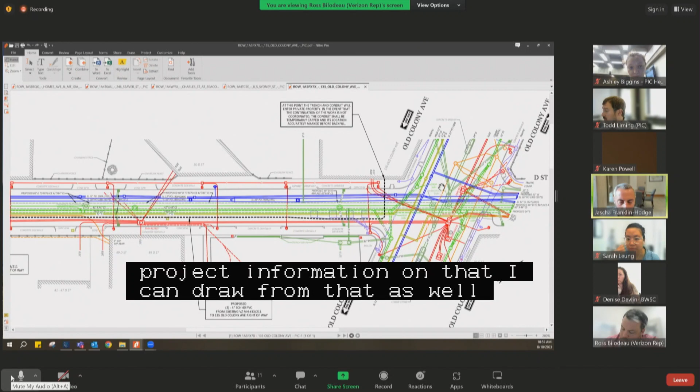All right, hearing no other questions from the commission, PIC staff or members of the public? One thing worth mentioning, this location, it looks like you're going to damage some traffic signal loop detectors. I know BTD is not on the hearing today, but that's definitely something you'll want to address. Those will need to be restored after the work is completed, and you can work with BTD on getting those back up and running. Sure.

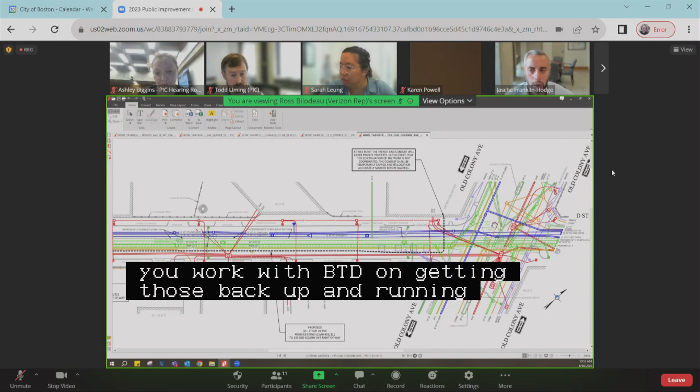All right, will you be ready for your public hearing in two weeks on August 24th? Yes, sir, no problem. All right, we will see you then. Thank you very much. Great, thank you for your time today. And that concludes our brief agenda.